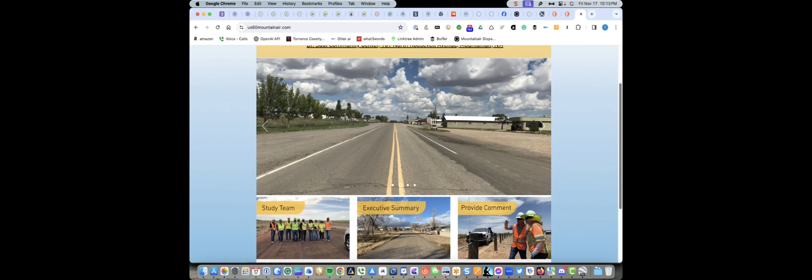While the website explains the methodology the project team intends to use for a traffic safety study, it omits the actual findings from that study. At the current moment, it's unknown whether or not such a study has been done.

The website also includes a note regarding the historic buildings in Mountainair's central business district, and you're going to hear a lot of talk about this part of town, which runs roughly from the Manzano Mountain Art Council building and the town hall west to Sunset Avenue, just before Mountainair's elementary school. Businesses located there are likely to be the most affected by the construction project.

The project website notes that there are 50 historic properties, 5 archaeological sites, and 4 buildings on the National Register of Historic Places within that central business district corridor.

The 4 register-listed properties include the Atchison, Topeka, and Santa Fe Railway Depot, the Shaffer Hotel, the Mountainair Municipal Auditorium, which I believe is a reference to the Dr. Saul building, and the Willard Mercantile Company building.

That is the location of the Manzano Mountain Art Council, and it's directly located along the north side of US-60 in central Mountainair. The website notes that this building could require, quote, management, end quote, as part of the study. Management is a broad term, and in this context could mean anything from preservation to eminent domain and then demolition. Neither the website nor last night's meeting sheds clarity on that.

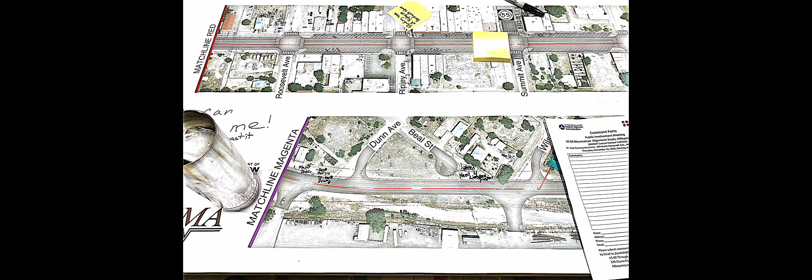Okay, so introductions, the study team. We've got the DOT, Dana Garcia, she's the project development engineer. And then Shelby right next to her - sorry Shelby, I don't know your last name - Hoagland. So Shelby. And let's see, my name is Matt Iver. I'm with Souder Miller and Associates.

I missed Jim Murray in the back, he's with DOT, he's the public information officer. He's with District 5, and Dana's with North Region Design. Shelby's with District 5. And did I say my name?

Okay, I'm with Souder Miller and Associates. I am the project engineer with Souder Miller and Associates, the project manager. I've got Devahi, Aveta, and Daniel Acosta, they're with Souder Miller and Associates also. And John Kashik, he's with R Engineering. He'll be, all your comments, we try to have everybody send their comments through John. It really helps us make sure.

The purpose of this project is to evaluate highway deficiencies, drainage issues, parking conflicts, multimodal safety, and accessibility to determine the need for improvements and upgrades. So the purpose drives just about everything for the decisions and improvements that are made.

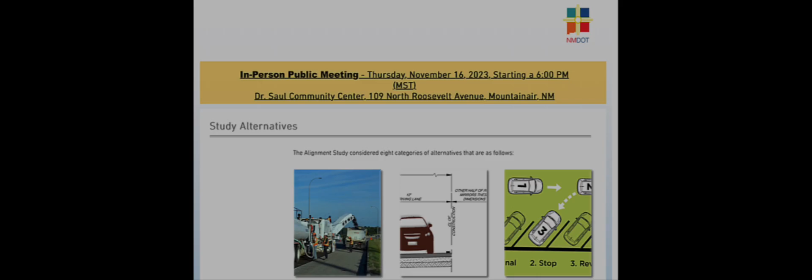So from that, this is our alternatives analysis. There's the safety and geometric alignment of the intersections. You guys have identified to us the drainage issues. We've identified some of our own: aesthetics through the town, public and business support, environmental considerations, multimodal opportunities, constructability is a big one, cost, and right-of-way.

And the right-of-way, we're not anticipating any right-of-way takes that would relocate any buildings or anything at this time. So any of the right-of-way we are proposing, say for drainage or stormwater detention, are vacant lots. We wouldn't relocate somebody unnecessarily.

So the alternatives we've identified, of course there's the no-build. That's the one where basically none of the alternatives would work for anything. It's just a maintenance consideration at that point. That is an alternative, it's not really recommended at this point.

Moving on from that, we've got roadway section revisions. Right now you have two 12-foot lanes in the rural sections of town. We would modify those to add 8-foot shoulders to those 12-foot lanes. In some areas we would also add either bike lanes with curb and gutter and sidewalk, extending the urban section further through town. So that's another change to the typical roadway section we have.

Moving on, drainage alternatives. Because we're going through an urban section, there's not too many options that we have. It's really storm drain accompanied with curb and gutter and sidewalk. That's the biggest drainage alternative.

Once we capture those flows, we have to do something with it. Once it's in that storm drain pipe, we can't just dump it out anywhere we want, so we try to figure out the best place to put that. Usually it's in some sort of detention area that holds the water, mitigates it just flowing straight away, and releases it at a controlled rate. That's detention—some of the areas we're looking at with the storm drain and drainage alternatives.

And then we have some other miscellaneous alternatives. I'll get into those - just to touch on them real quick. They're things like green bike lanes, grid pattern crosswalks, rectangular rapid flashing beacons, and ornamental lighting. But the ornamental lighting is kind of a higher decision. So those are the miscellaneous ones.

Getting into a little more detail on this rural section map, the best way to describe it is you've got a red line and a green line. The red line is what we call the rural section - that's where we'd apply the rural segment of roadway. The green one is urban, so that's the curb and gutter and sidewalk. Where we have the dashed red and green, that's where we were kind of like, well, do we take it? Where do we stop each one? So that was the alternative.

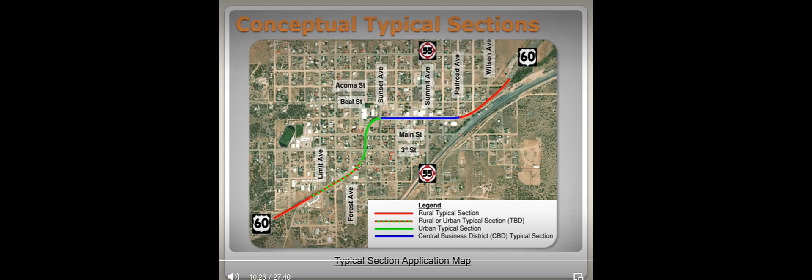I think through our past discussions we've gone ahead and extended where that dotted red and green would actually just be green at this point, so that would all be urban section. The curb and gutter and sidewalk goes all the way down, a little bit past Limit Avenue there. So that's the idea, and that's essentially what this next slide lays out. Sorry, I kind of got ahead of myself.

So this is alternative 2. You can kind of see with the arrows - that's just what I explained. You've got the 12-foot driving lanes, 6-foot bike lanes, curb and gutter, and sidewalks. The right-of-way does vary through these sections, but that's the basis for the urban section alternative 2, to extend it all the way down a little bit past NMDOT.

And then we have the central business district section right out here. We've got 12-foot wide driving lanes, a bike lane. We have a little 2-foot section in there that's basically a valley gutter, but just kind of ignore that for now. And then we have the parking configurations - there are several different parking configurations on the table, and I'll get into those in just a minute. So that is the central business district section.

And then here we have the parking alternatives. Right now we've recommended the back-in angle parking. There were essentially 4 to begin with: head-in angle parking, perpendicular parking, parallel parking, and back-in angle parking. The first 2, head-in angle and perpendicular parking, actually conflict with bicycle lanes, because the bike lanes would be behind vehicles with potential for somebody backing out and colliding with bicyclists. Our guidance from professional organizations recommends against putting bike lanes in that scenario. The 2 scenarios that work with bike lanes are parallel parking and back-in angle parking.

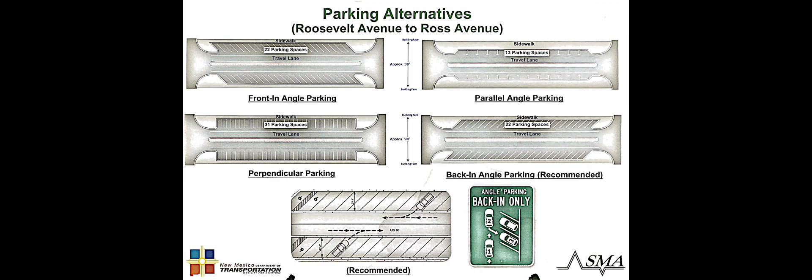Moving on from back-in angle parking, the minor intersection modifications. This is a list of the ones that we recommend to realign. I don't want to go into all of them, but they're pretty well detailed on the roll plot in the back, what that would actually look like.

This is essentially the idea: you've got a straight through street intersecting US-60 at a fairly skewed angle, creating a skewed intersection. So we're trying to realign those. Of course, we would like to have them line up, but because of established streets, it just makes an offset intersection. That is actually preferable to the skew, according to all of our guidance.

Some of the other minor intersection modifications include cul-de-sacing of Corbett Avenue, which currently intersects US-60 at 3rd Street, where US-60 and Corbett all come together in one spot. So it's really a 5-legged intersection.

Right now it serves 4 people that we can tell, and I think the one off of 3rd, just on the south side of 3rd Street, that driveway is actually on 3rd Street, so I don't know that frontage is really on Corbett.

Then there's Beal Street. I know from our conversations earlier that there's some concern about larger vehicles using that and needing to come off of US-60, so we can look into that more. Because of the way Beal Street intersected US-60 right there, it was a preliminary recommendation to cul-de-sac Beal Street.

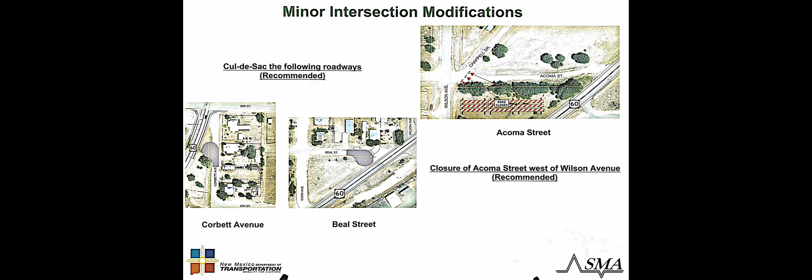And then, of course, the drainage improvements are under review. The biggest thing is that solid red line would all be storm drain. We capture the water at different locations in curb drop inlets, and then take it to those light blue areas, which are detention areas. I'm not supposed to call them ponds, but yeah, detention areas.

Our vision for these detention areas is not that there are deep pit holes in the ground that are fenced off. They're probably more like what we call a bioswale, where they hold the water. It may not be surface water for very long—it infiltrates the ground. We would encourage infiltration through different soil type mitigations that allow quick infiltration. Probably some trees, shrubs, those kinds of things would also be added into those bioswales.

Whatever we can get to fit to make it so it's not this fenced off pit right next to US-60. The other last part is the roadside ditches, those bright green lines on the south edge. That's pretty much what you have now, just a little bit more formalized in our division.

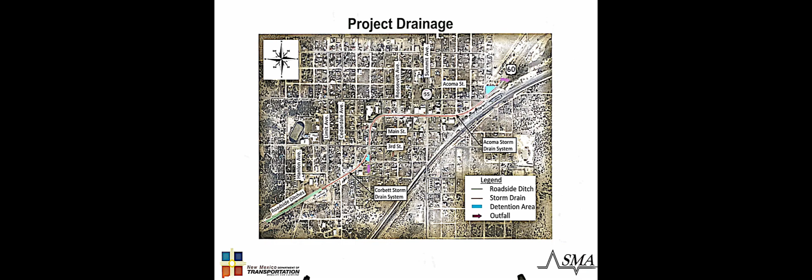Then we have the multimodal improvements. This is the sort of miscellaneous section. So we've got pedestrian and street lighting—we'd increase the street lighting. I know the street lighting out here, we'd get it a little bit more. We'd actually do analysis on it to figure out what the brightness levels are, the uniformity of those street lights, and that kind of stuff.

The next one is color pattern crosswalks. This came from a recommendation out of one of the urban plans, to use color pattern crosswalks at the crossings. It's not really shown here, but at the crosswalk, that would be color pattern concrete. But we would still need to outline the edges of it with white bars—that's required by the traffic guidance.

Then we have the rectangular rapid flash beacons. At some of these crosswalks where there's not a signal, like at 55, we would add additional emphasis to the crosswalk with these—I don't know if you guys have seen them. It's really just a bar that sits below the pedestrian sign. Somebody hits the button and it starts bouncing that light back and forth, so that somebody on US-60 notices someone's crossing the road. It just adds additional emphasis.

And then we have the green bike lanes adjacent to the parking. Again, this just calls out increased heightened awareness that there might be a bicyclist in that lane. So that's the purpose for the green bike lanes.

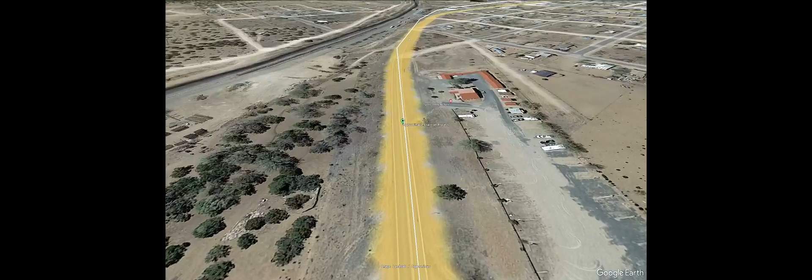Bike lane dropping off at Ross and coming down Main Street — so rerouting the bike lanes off of US-60, not off completely, but just through the central business district, down Main Street. That is an option. It's difficult with the funding that we have, because the funding a lot of times is tied to that multimodal designation. We have to demonstrate to the feds that this was taken care of, check, and moving on, so that can be done. It takes a lot — not going to say it's impossible, but it does take a lot.

So widening, keeping the sidewalks wide on the central business district — yeah, I think we can do that, we can look into that. Some of the scenarios that we show, there's at least 2 feet. I know that doesn't sound like very much, but in terms of sidewalk going from 5 to 7, it's quite a bit. 5 to 10 is a little bit rough. If we were to add that, I think right now they're closer to 8 or 10 in some of those areas.

In order to do that, we have to really pinch that median in the middle. We were counting on that median to get the street lights in that we wanted to. The bases on those street lights are 2.5 feet wide, and we don't like to have them right next to the driving lane. We like at least 18 inches on either side to accommodate a little bit of grace for people. So we don't like to pinch that median down too much, but we can possibly gain a little bit out of the driving lane.

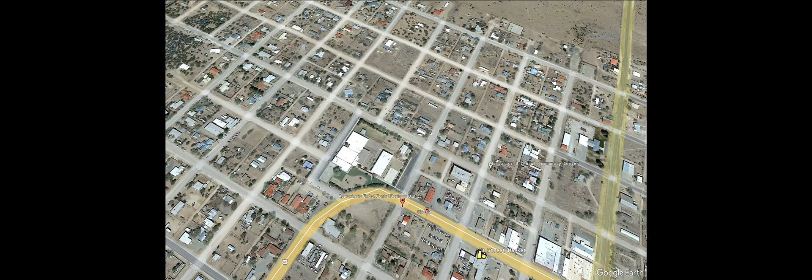These are just kind of starting points for us. Definitely good to get the comments and hear your perspective on those kinds of things.

So other than trying to get a bike lane in, is there really anybody in town that's all for the back-in parking?

I do have some comments, and I'm not going to say names, but we do have some comments in support of back-in parking. I'm going to go.

Thank you. My name is Ernie Lopez. I have a question: if it were to stay head-in parking on the angle parking, in that scenario, is there still a median in the middle?

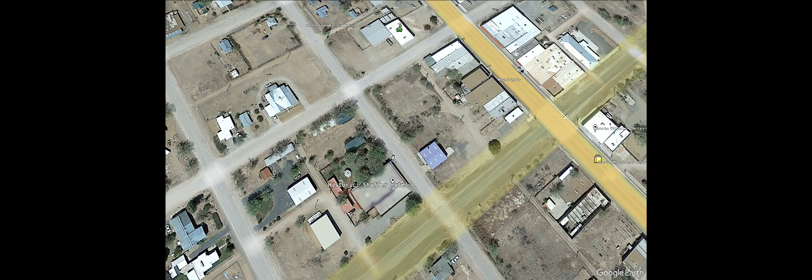Thank you, Ernie. So there doesn't have to be a median in that scenario. In the back-in scenario, it's there to basically force you not to cut across the double yellow in the middle and park head-in on the opposite side of the street. So the median forces people to back in. But if it's head-in angle parking and people want to back across the street — we do it now — so no, the median wouldn't be required, but again, it does help with the lights, it helps with the speed. I guess it's detrimental to snow collection, but the point is it would be there for the lights.

Do you have a real quick follow-up? I like the idea of the median being there regardless of whatever angle we take, because it does stop people from cutting in the opposite way, so I like the idea of the median either way. And with the 6-foot wide median, it does allow for pedestrian refuge at the intersections.

My name is Matthew Lisk, I'm representing Western Hardware here tonight. I have a question similar to Mr. Spencer and Mr. Anaya about the median and sidewalk access. He mentioned a lot of trucks coming through town — we have heavy traffic, oversized loads. At the hardware we get truck deliveries 3 or 4 times a week, so exiting and entering the highway with the median and sidewalks being added, are those just going to get constantly run over and turn into rubble within a couple years, or will there be enough access for them to get wide enough to get out onto the highway?

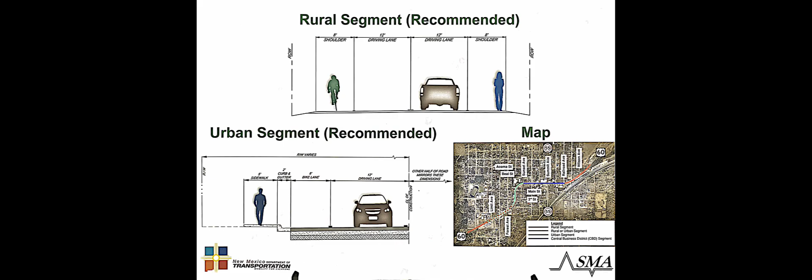We're a business and working man's town, working class town, I should say. So the angle parking, if we do the angle parking that apparently is recommended, we're a town of trucks as well as cars. Some trucks are dualies, some are not, but large.

And if they back in to the post office or St. Vincent or the Mezzanore or wherever, they're going to impede on the sidewalk. They're not going to stop when the back of the truck gets to the sidewalk. They're going to back up maybe until their wheels hit the sidewalk. That's going to be a problem for people, and dangerous. So I think that's just trucks.

I'm also concerned about the back-in parking. We've got an elderly population, I'm one of them. I can't guarantee that I'm not going to run into the car or truck next to me as I stop, look around, back up, stop, get myself back out again, back in. I just think that's problematic, really problematic.

And one accident requires insurance, probably, maybe a call to a police officer to come over and investigate whatever happens. But I just think the front angle parking is the more appropriate way to go.

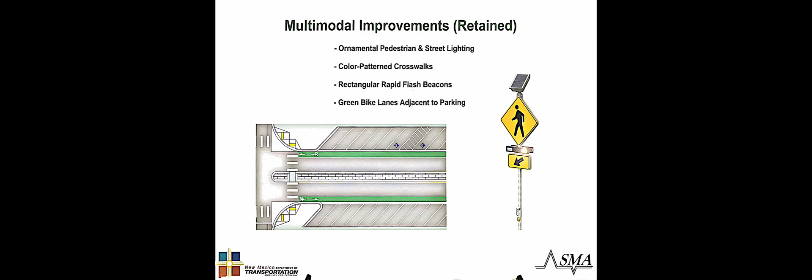I think I have a question, actually a comment. My name is Jesse Lotus, and I'm just wondering, why fix what's not broken? Everything's been working the way it is now. Can we just get some new asphalt, some new sidewalks, new light poles, some drainage, and some more handicap accessible sidewalks? I think that would be awesome. And then do the angle parking, so the bike lanes go in the middle.

We definitely hear what you're saying. The feds say since there's no bike lanes, there's something broken - there's not that accommodation. So what if they put that somewhere along, maybe keep everything else the same. Just one thing - if the feds say we need a bike lane just for that 1.5 miles, maybe just put a bike lane there. The guy that got hit and killed wasn't even in town - he was on Highway 60, and there's not even a shoulder there. So these guys riding from Belen all the way to Mountainair, into Estancia, Santa Fe - why are we so worried about a mile and a half?